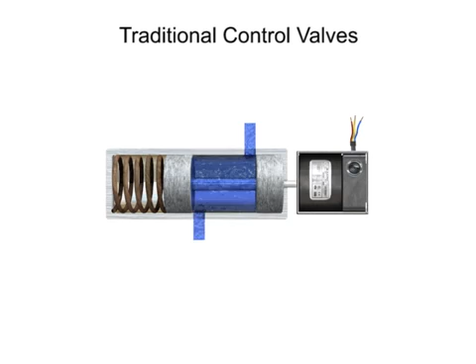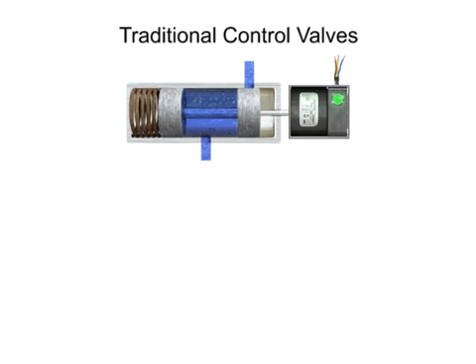Control valves are valves used to control conditions such as flow, pressure, temperature, and liquid level by fully or partially opening or closing. Traditional control valves are the most basic type. The flow control of a traditional control valve is typically limited to fully open, fully closed, or fully switched to a new flow path.

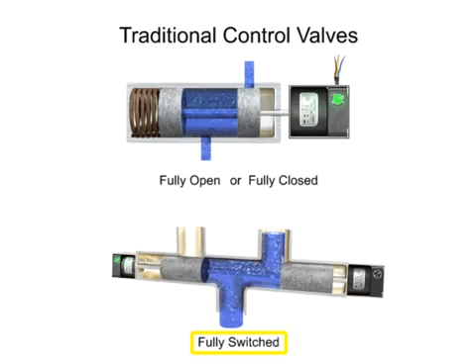Traditional control valves are of simple design and capability. Changing direction, flow, or pressure during machine operation would require a complex hydraulic circuit. Each desired direction, flow, or pressure would require an individual traditional valve to control it.

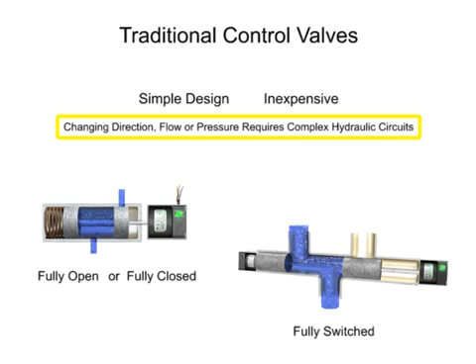Proportional control valves offer a solution to the complexity dilemma without introducing dozens of valves and hydraulic loops to the system. Physically, proportional valves appear similar to their on-off solenoid counterparts. The big difference is in the way their solenoid coils perform. Proportional coils operate on DC current and produce varying voltages that in turn produce a variable force to shift the spool.

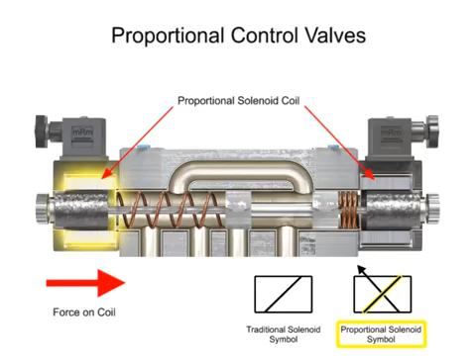The graphic symbol for this type of solenoid shows the solenoid slash in the operator box with a sloping arrow through the slash. With proportional valves, the spool can be shifted against the centering spring force to any distance up to full shift by varying voltage and current.

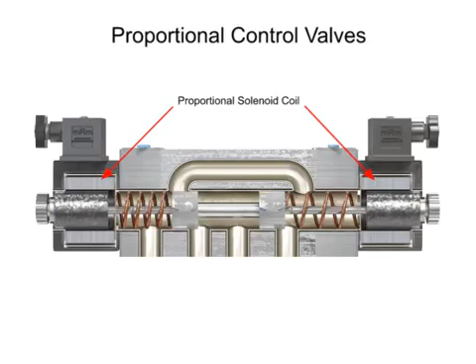As the internal valve spool changes position, new flow areas open up gradually and continue to open wider during full spool travel. To eliminate flow lag from spool overlap, most manufacturers cut V-notches that allow some flow to pass as soon as the spool moves.

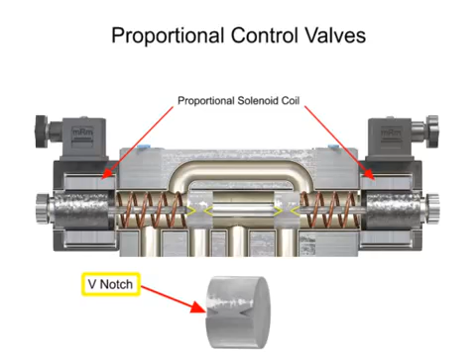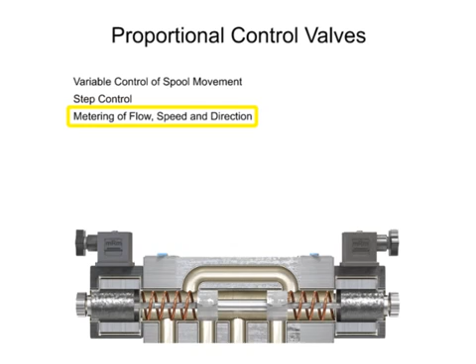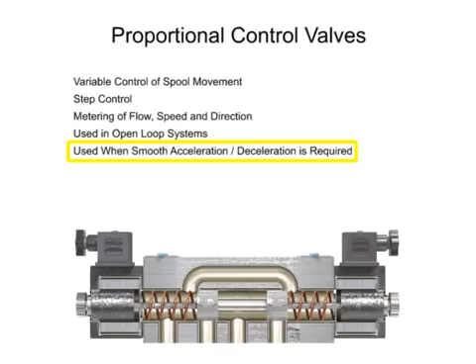Proportional control valves allow for variable control of spool movement, which allows more step control and metering of flow, speed, and direction. Most valves of this design are used in open-loop systems to smoothly accelerate and/or decelerate an actuator or cylinder. The proportional control valve allows for a simpler hydraulic circuit, but it is not accurate over a broad range of pressures, flows, and temperatures. Neither are they highly responsive.

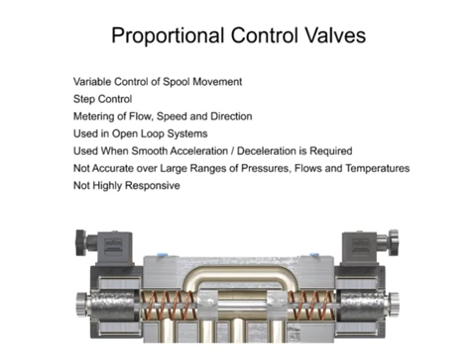Proportional valves offer a variety of machine cycles, which can safely be operated at greater speeds and result in improved machine cycle times and production rates. The third type of hydraulic directional control technology is called the servo valve. First developed in the 1940s, the servo valves operate with very high accuracy, repeatability, and high-frequency response.

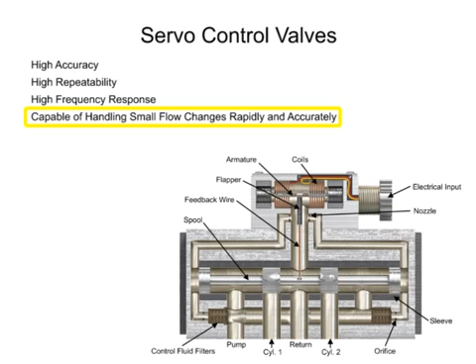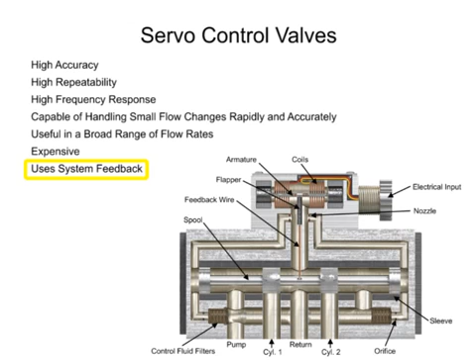Servo valves are highly responsive and capable of handling minuscule flow changes both rapidly and accurately over a broad range of flow rates, but at an extra cost. The main difference between proportional and servo valve circuit design is that servo systems have a method of feedback that assures that the actuator is doing what the controller tells it to do.

Most industrial applications use feedback from electronic linear, rotary, or force transducers. A transducer is a device that produces an electrical signal in direct relation to a position, force, or speed. These devices feed a precise position or speed indication back to an electronic controller via a feedback wire, which in turn adjusts the valve.

Fluid from the pump inlet is tapped off through filter elements, passes through orifices past both ends of the spool, goes on to nozzles, and out to the return line. A feedback wire attached to the flapper terminates in a ball end that sits in a very close-fit slot in the spool.

When the torque motor coils receive a current signal, the armature rotates clockwise or counterclockwise and pushes the flapper closer to one nozzle and farther away from the opposite one. This allows pressure to increase at one end of the spool and decrease at the other. The spool then starts to move away from the higher pressure. If the armature turns clockwise, pressure builds on the left end of the spool and it moves to the right.

With these very accurate feedback devices and a fast response servo valve, an actuator's position, speed, and/or force can be repeatedly established within an extremely close range. Electronics provides the accuracy while hydraulics provides the force via a super responsive servo valve.

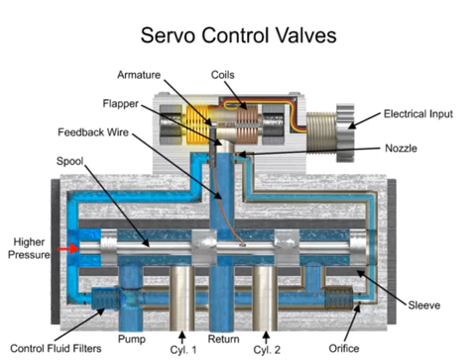Proper evaluation of the requirements for a particular application can assist a technician with evaluating the performance of a valve and its suitability for the task at hand.